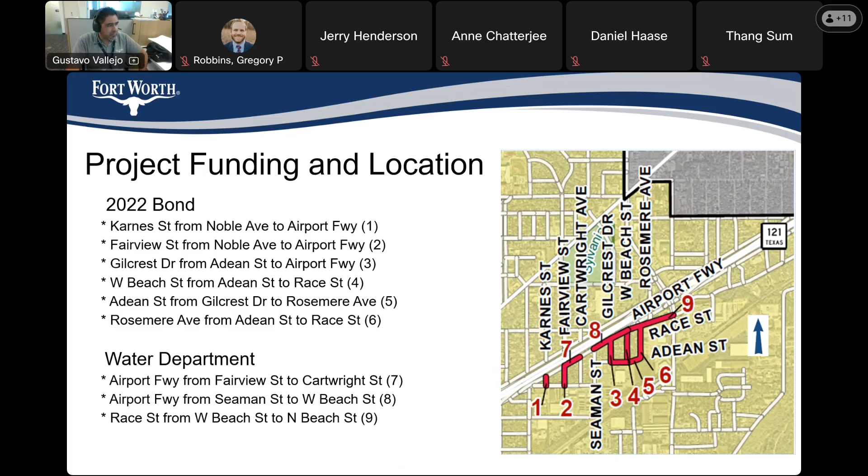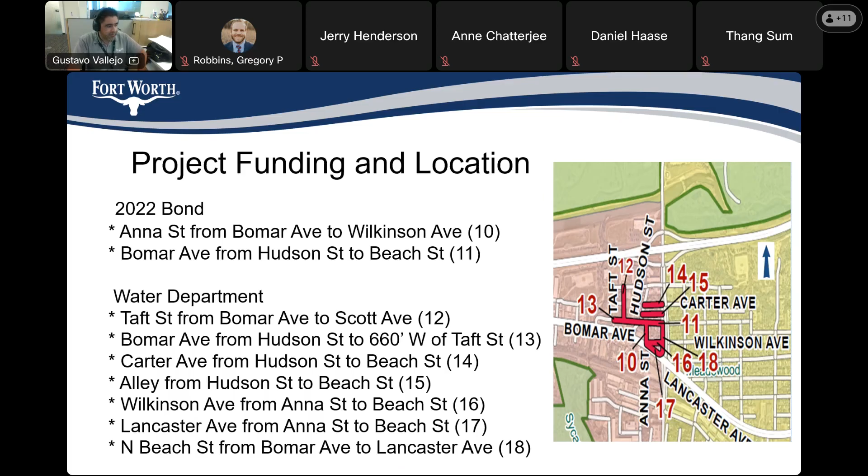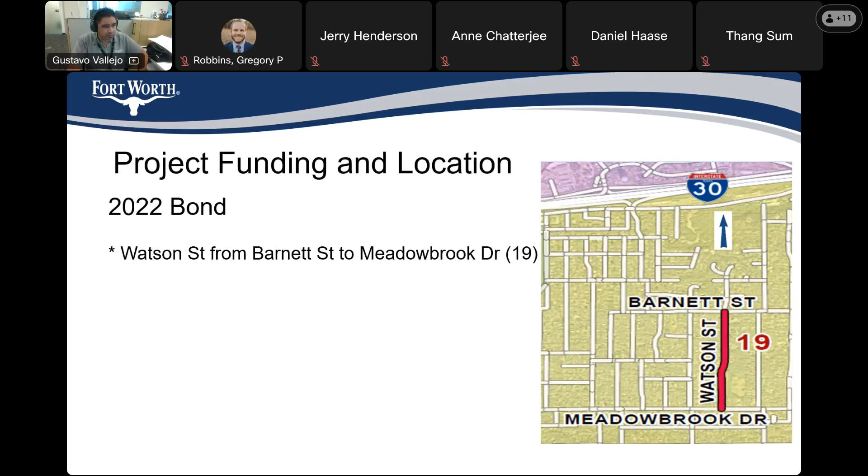On the next few slides, I will discuss the existing conditions present on these streets and go into more detail about the scope of each street.

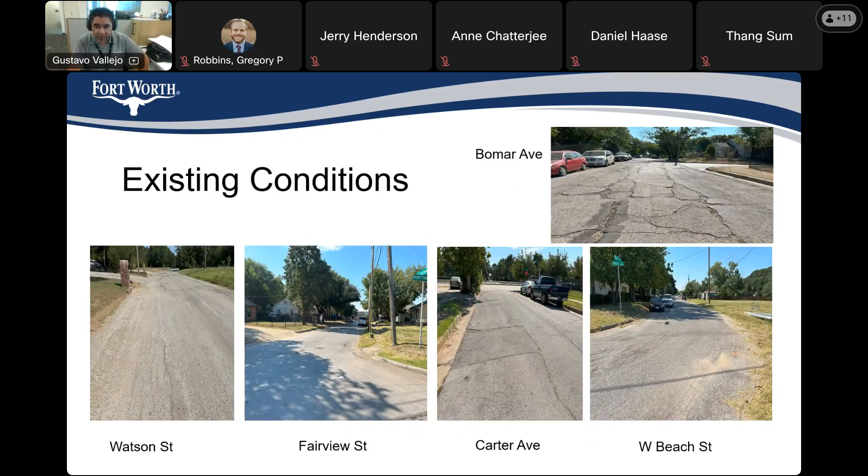On this slide, you can see the similar conditions of deteriorated asphalt pavement on Watson Street, Fairview Street, Carter Avenue, West Beach Street, and Bomar Avenue. Next, I'll go over what we will be doing to make them better.

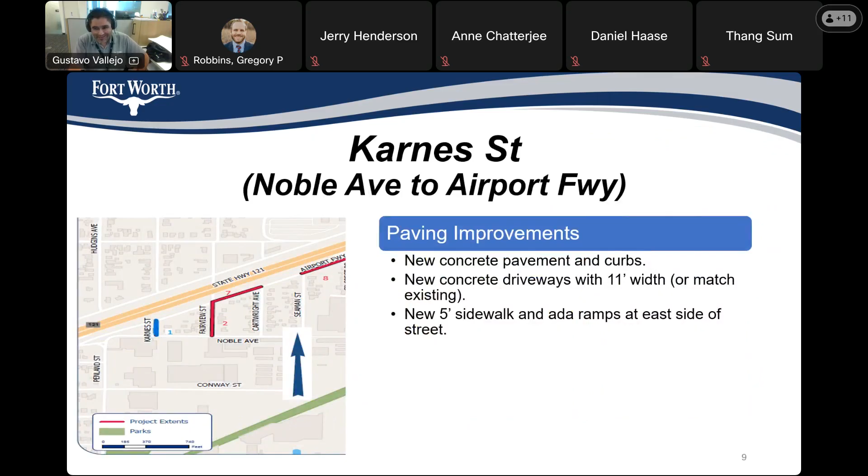For Fairview Street, from Noble Avenue to Airport Freeway, we have new concrete pavement with curbs, new concrete driveways with 11 feet minimum width, new ADA ramps, and a 5 feet sidewalk on the east side of the street.

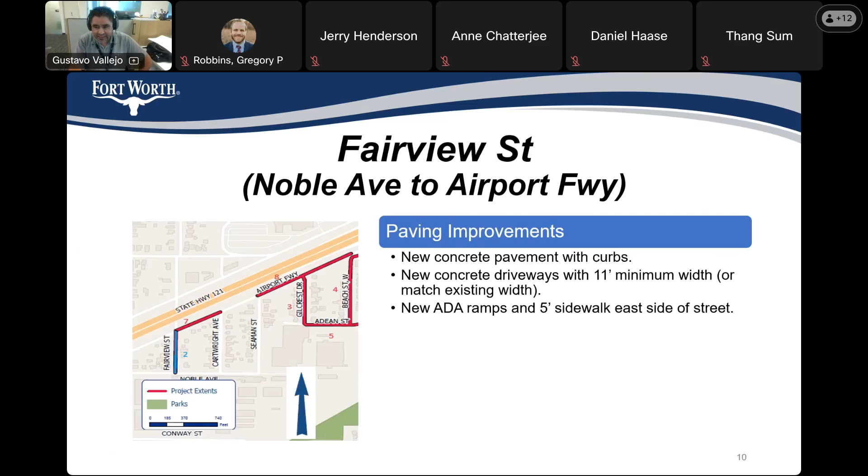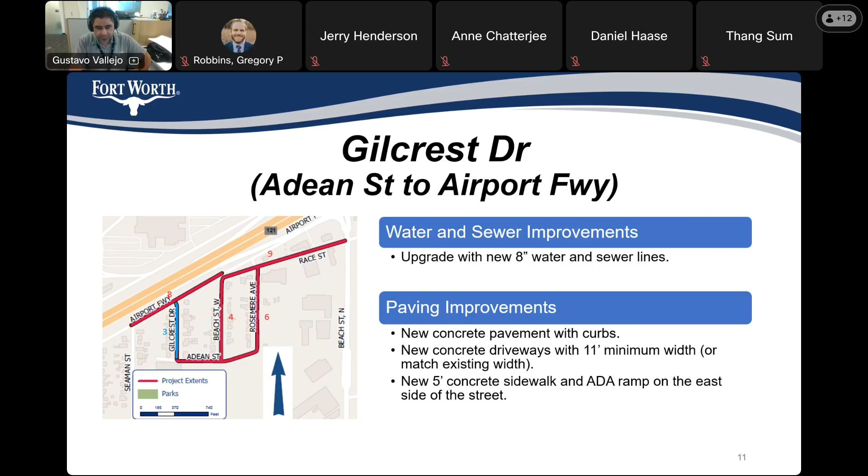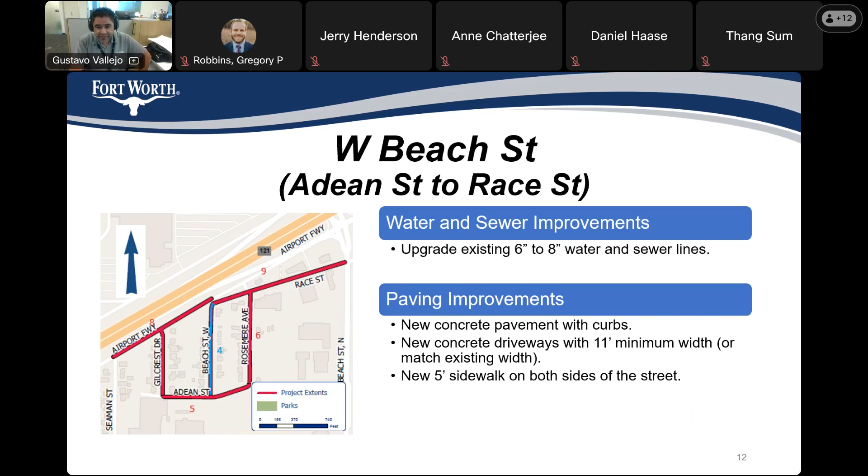For West Beach Street, from Adean Street to Race Street, we have upgraded existing 6 inches to 8 inches water and sewer line. For paving improvements, we have new concrete paving with curbs, new concrete driveways with 11 feet minimum, and new 5 feet sidewalk on both sides of the street.

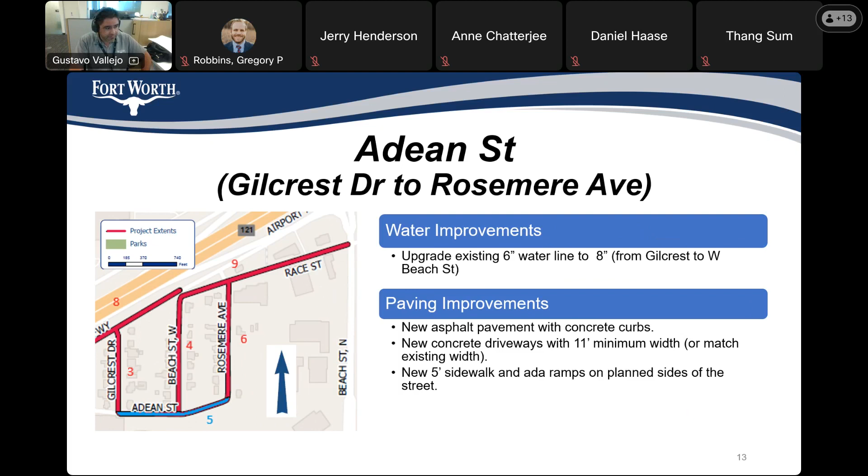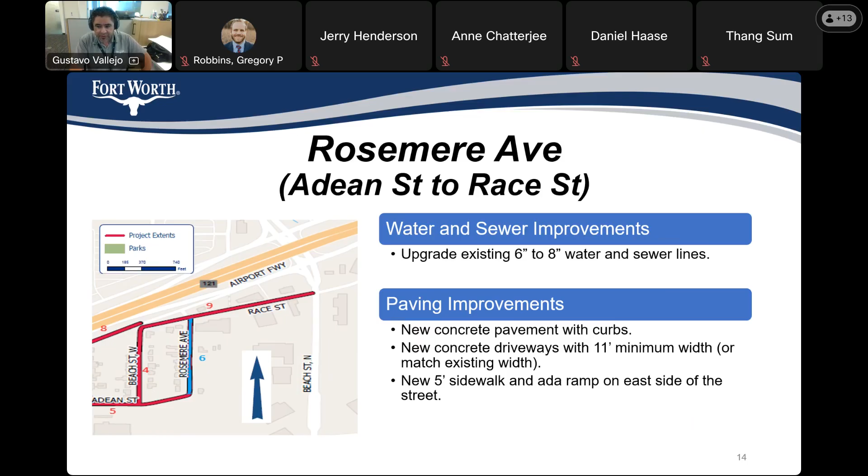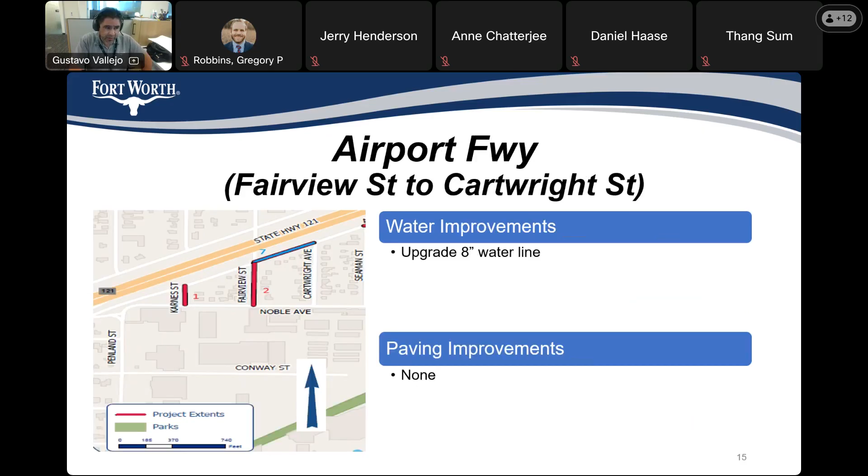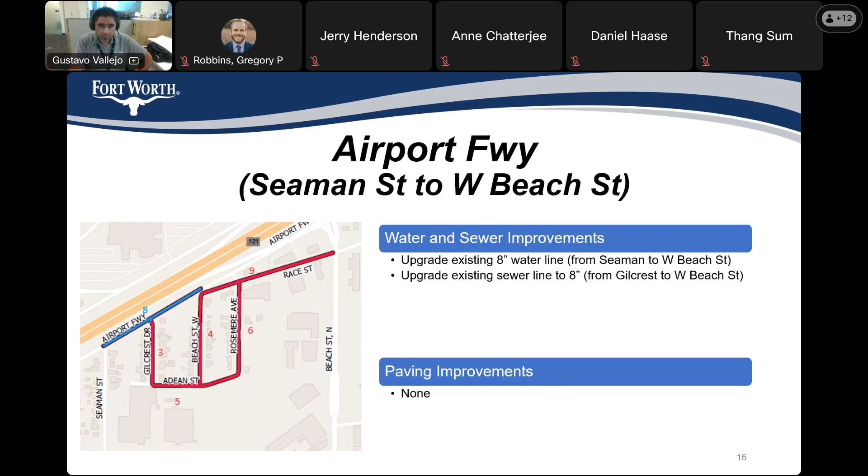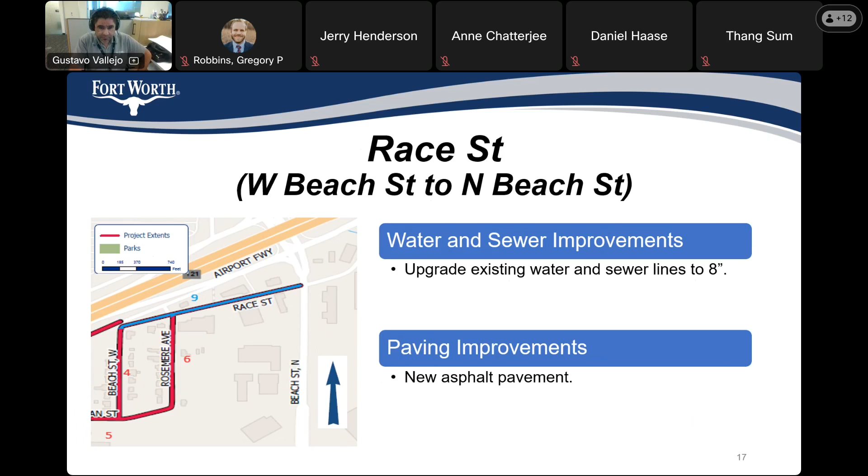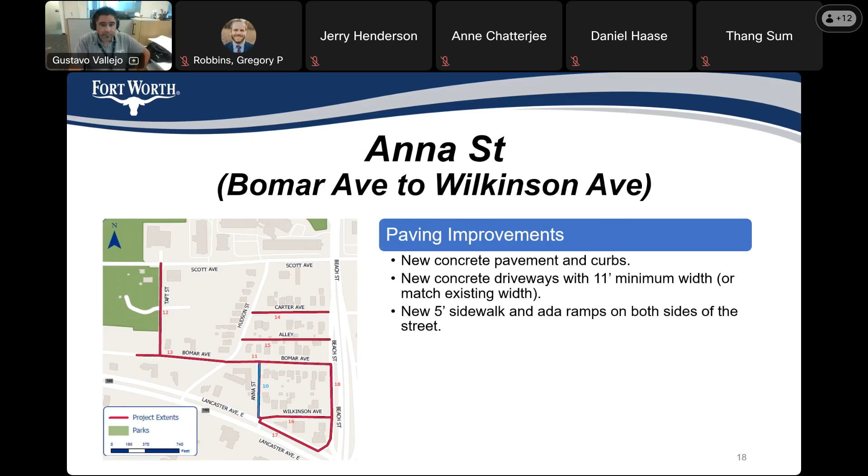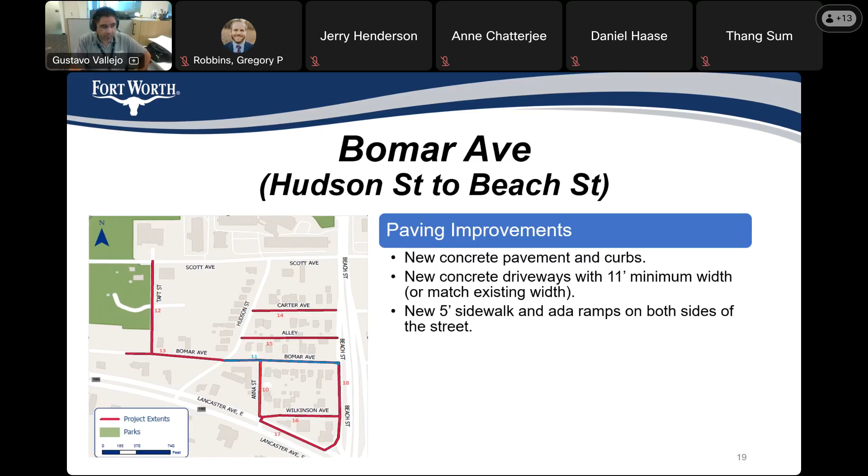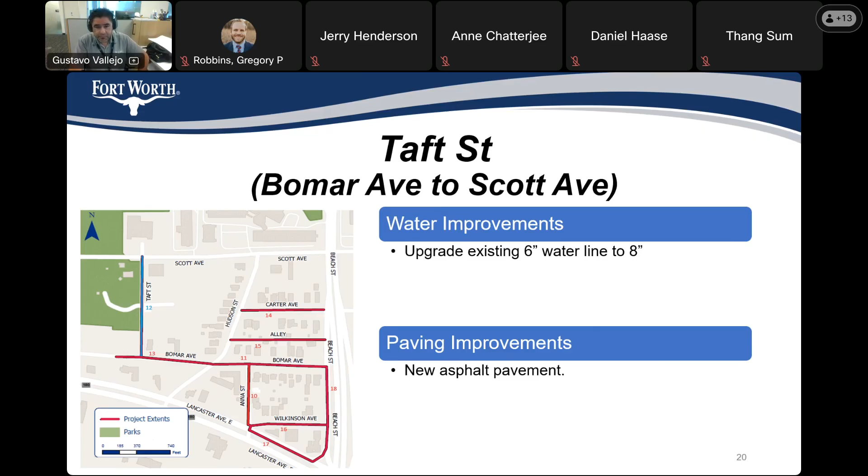For Bomar Avenue, between Hudson Street to going 660 feet west of Taft Street, we have water improvements to upgrade 6 inches water line to 8 inches, and new asphalt pavement.

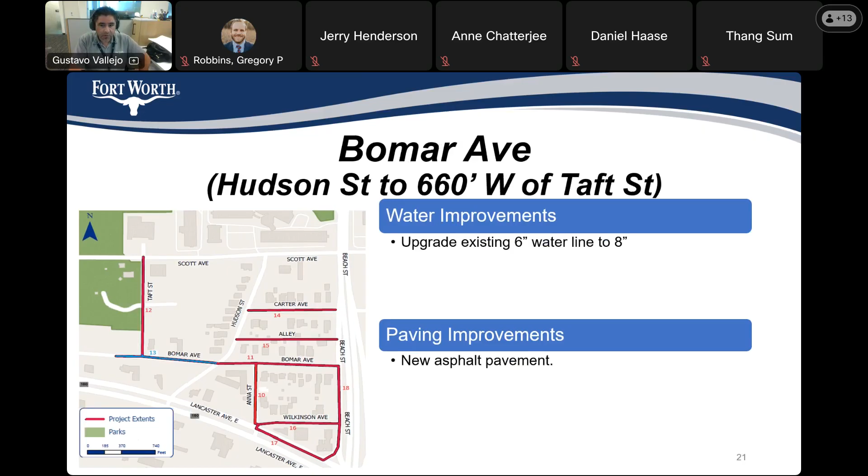For Carter Avenue, between Hudson Street to Beach Street, we had to upgrade existing 6 inches water line to 8 inches, and new asphalt paving.

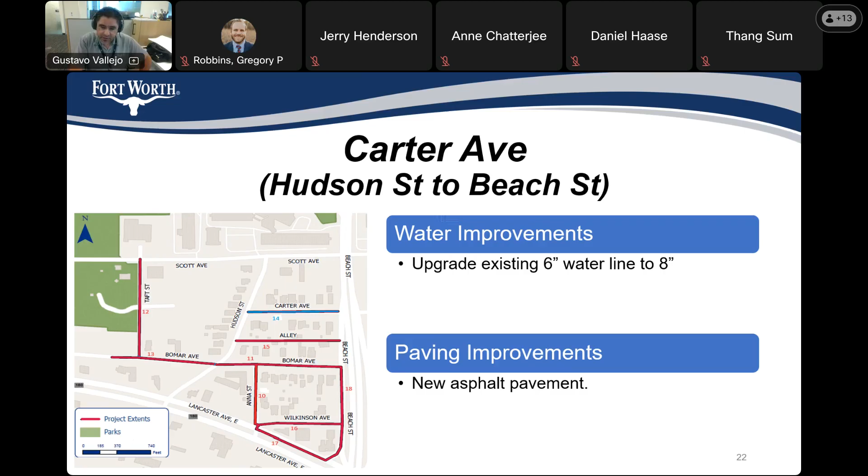For this alley between Carter and Bomar, and Hudson Street to Beach Street, we are looking to upgrade the existing 6 inches sewer line to 8 inches.

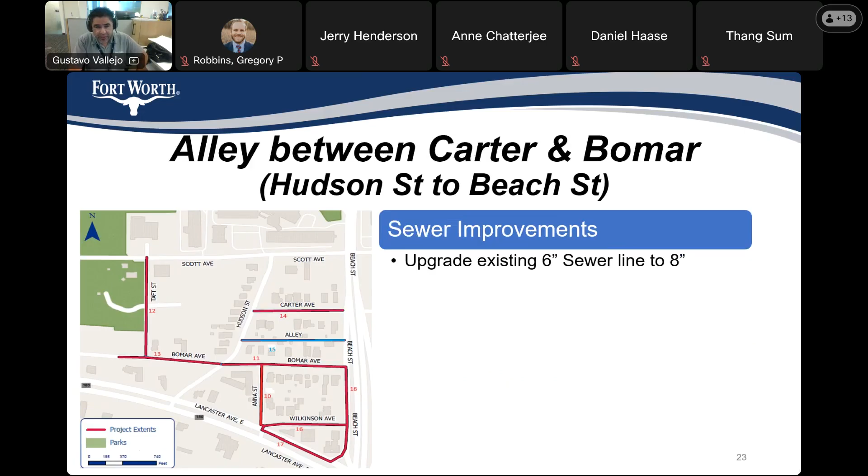For Wilkinson Avenue, between Anna Street and Beach Street, the water improvement includes the upgrade of existing 8 inches water line, and the paving improvements include new asphalt paving.

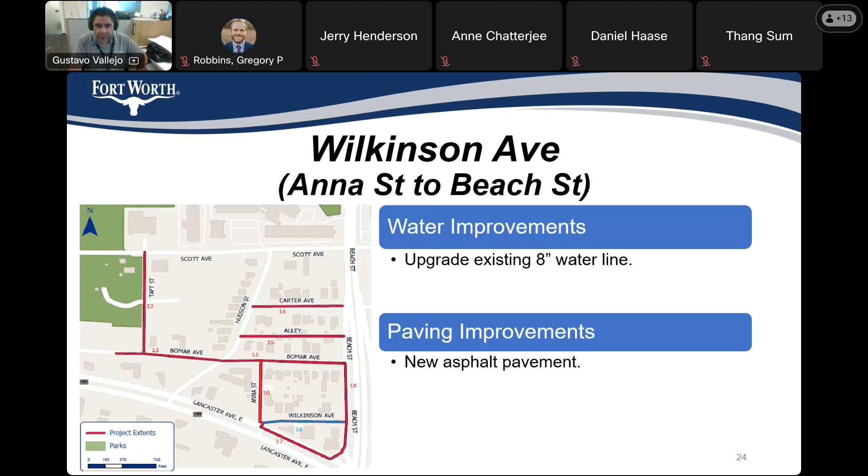For Lancaster Avenue, between Anna Street to Beach Street, the water improvements include upgrading existing 6 inches water line to 8 inches. The paving improvements include asphalt paving.

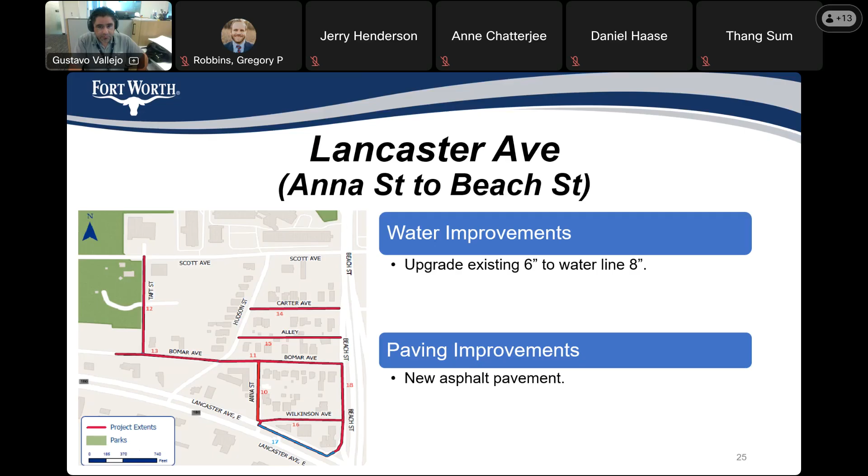For North Beach Street, between Bomar Avenue to Lancaster Avenue, water improvements include upgrading the existing 8 inches water line, and new concrete paving for paving improvements.

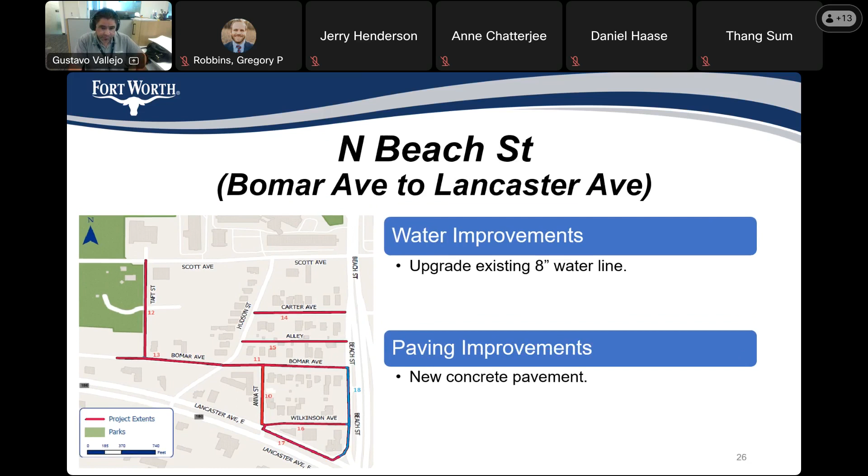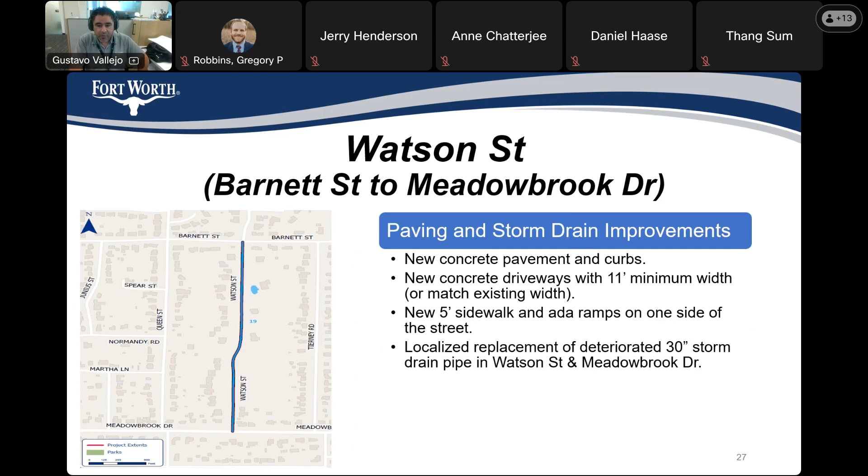On the next slides, we will be going over some construction information and frequently asked questions.

Why are we doing this project? As mentioned earlier in the presentation, this project is funded by the 2022 bond, which the residents of Fort Worth voted on, which targets locations in the city that need street improvements. TPW partnered with the Water Department to also replace underground utilities in those areas.

Will our water be turned off? There are two instances when your water will be turned off: first, when the service is transferred from the existing line to the temporary line, and second, when it's transferred from the temporary line to the new line. You will be given notice before that happens.

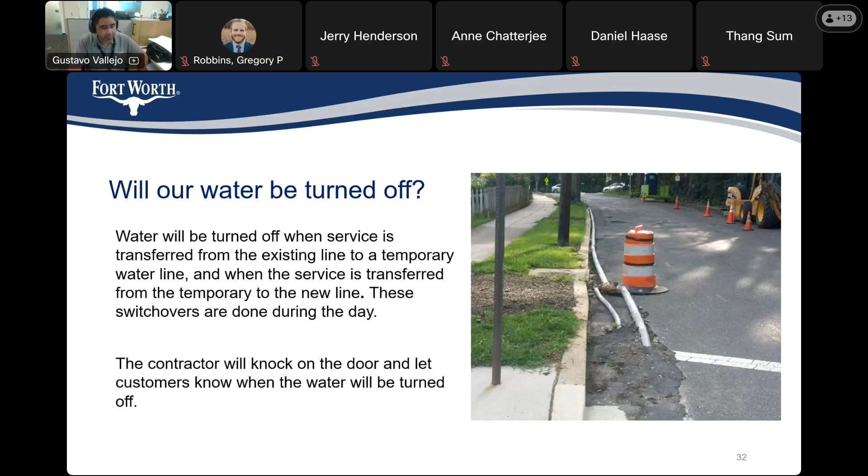How does a temporary line impact my home and water bill? The temporary line is to make sure you don't go without water during the construction. You will be billed based on your previous usage.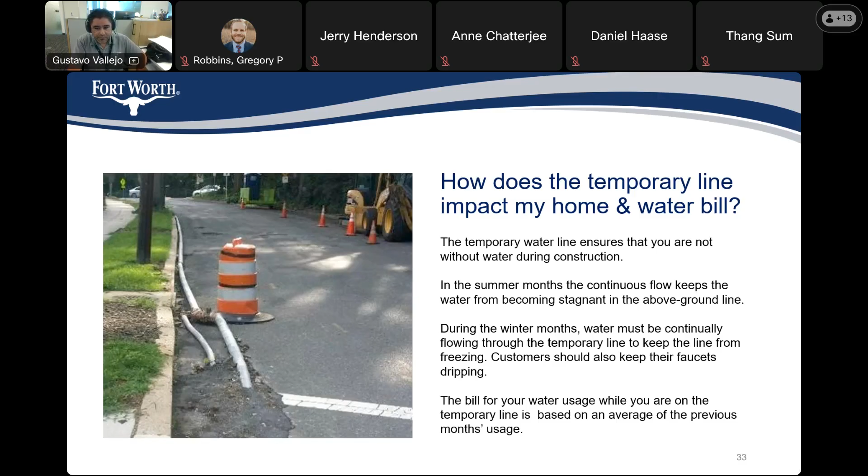Do you replace the water service line up to my house? We replace the water service line from the main line in the street onto your property line. We will also replace the water meter.

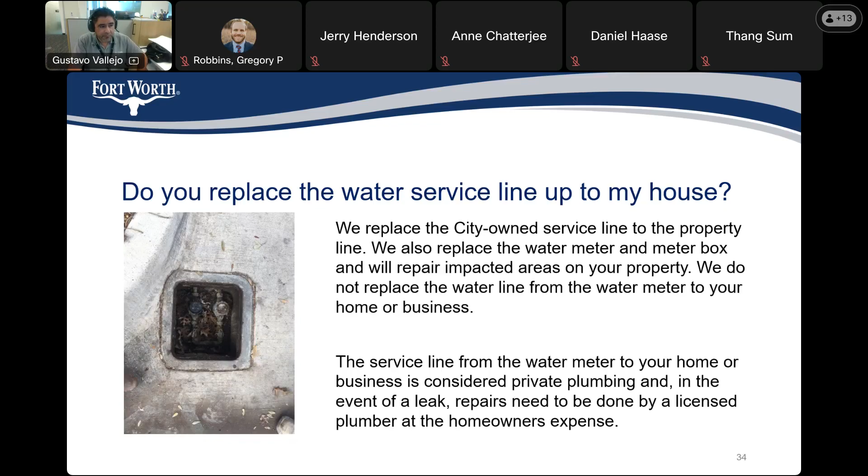Will you need access to our property? If we need access to your property, we will contact you. Will our sewer service be disturbed? No, your sewer services won't be interrupted.

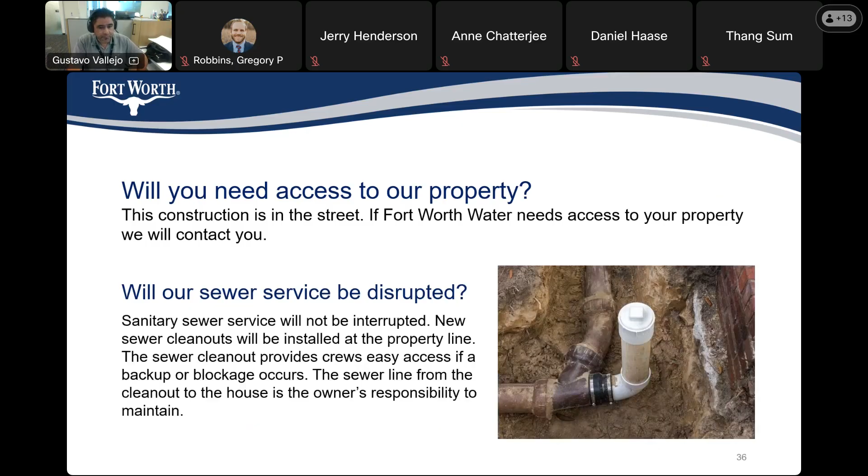Will the construction affect my irrigation? The contractor will cap the irrigation lines before they start. They may ask you to turn on your irrigation system so they can locate and flag the sprinkler heads.

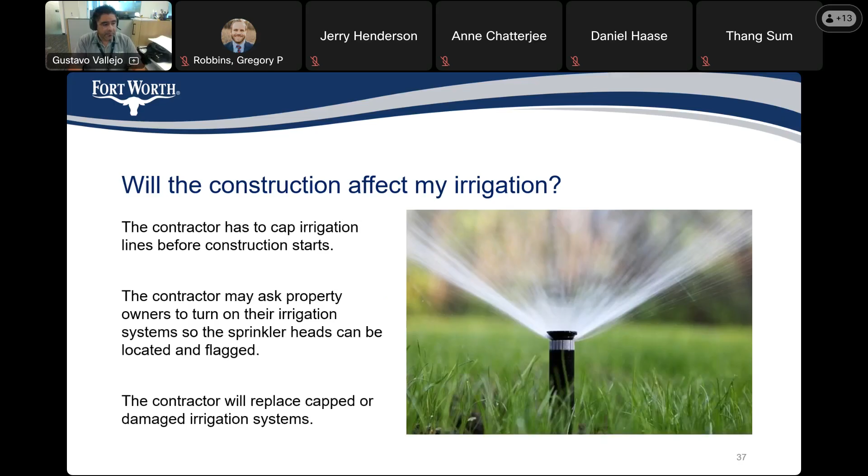Are we getting new curb, gutter, and sidewalks? As mentioned earlier, concrete curbs will be replaced on the bond-funded streets. Limited portions of the curb and gutter will be replaced on the water department funded street. If your driveway is to be replaced, the city will only replace the portion that is in the city right of way, not all the way to your garage.

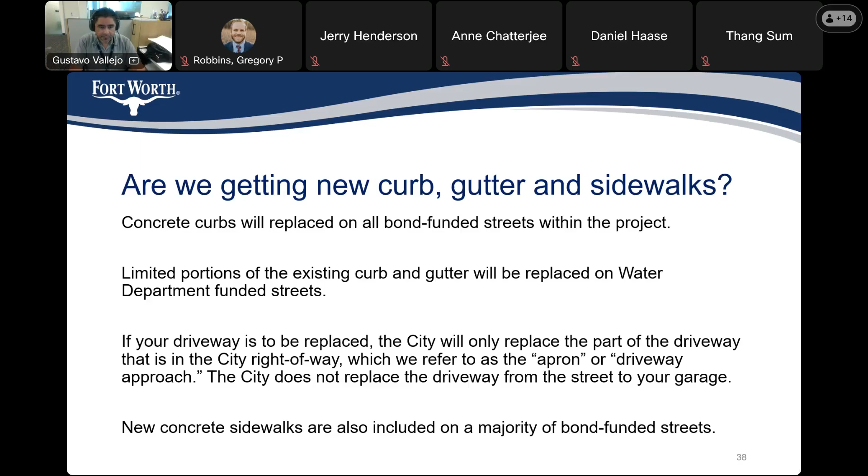Will I be able to access my driveway? There are two instances when you won't be able to access your driveway. The first is when pavement is being placed directly in front of your property, and the second is when your driveway is being replaced. You will get a heads up before this happens so you can make arrangements.

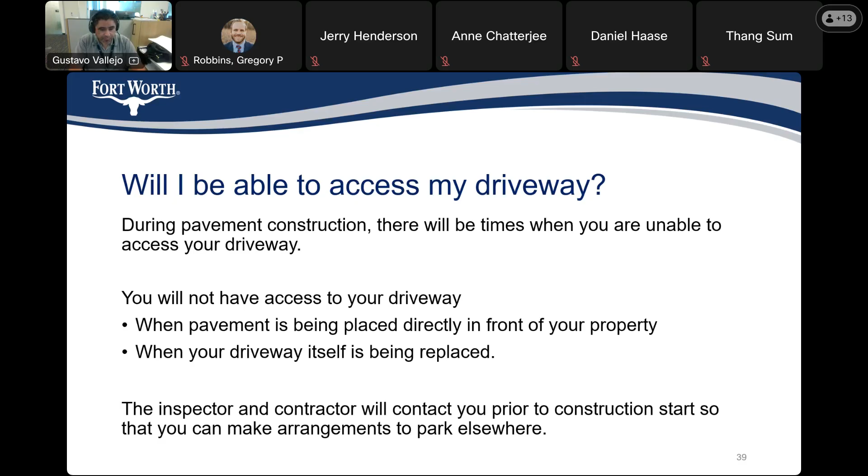What happens if my property is damaged? The contractor will take pictures and videos of the property before construction starts. We also encourage you to do the same. If there is any damage caused by the contractor, they will be responsible for it.

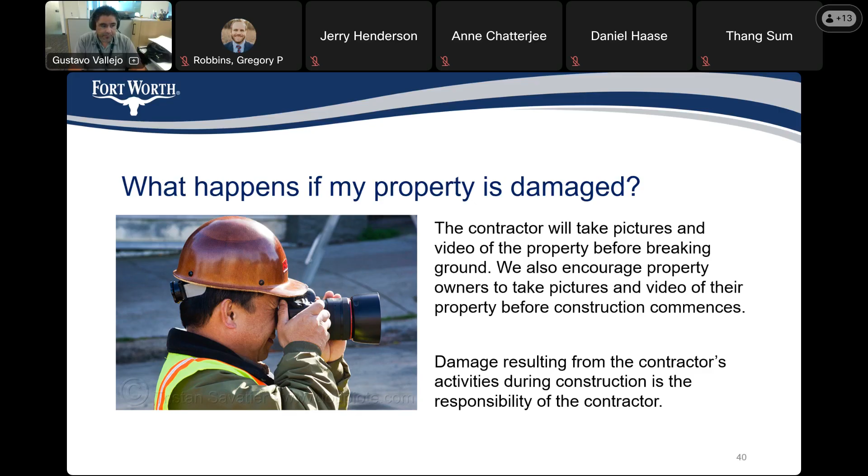Will there be lane closures during construction? There will be lane closures when the contractor is installing the water and sewer lines and when they are paving. There will be signs posted during those times.

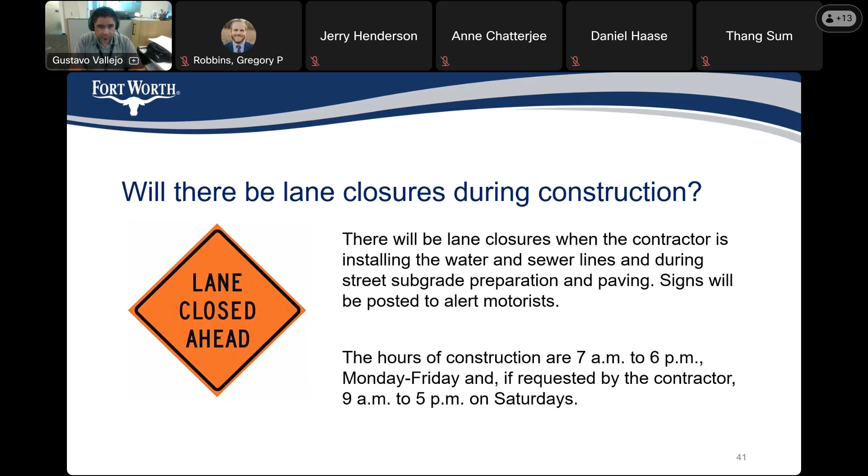Will the city trash truck be able to pick up my trash and recycling during construction? If your side of the street is closed on a trash day, the contractor will move your trash and recycling carts to the opposite side so they can be picked up.

Next, we will go over the construction phasing and schedule for this project.

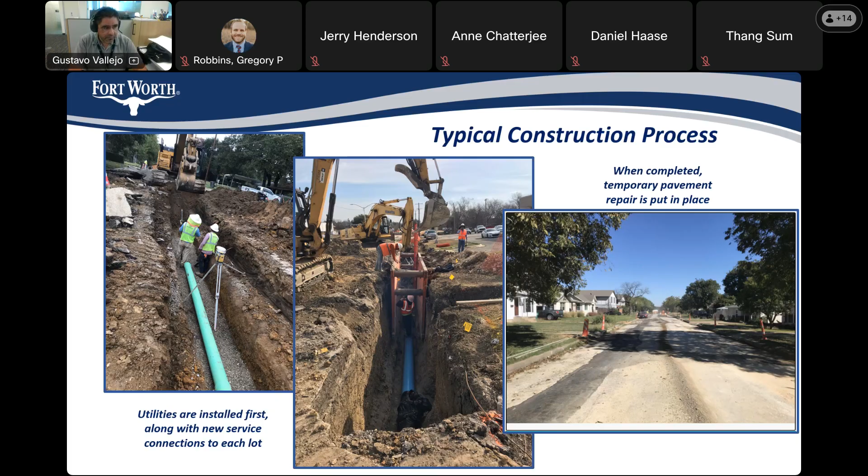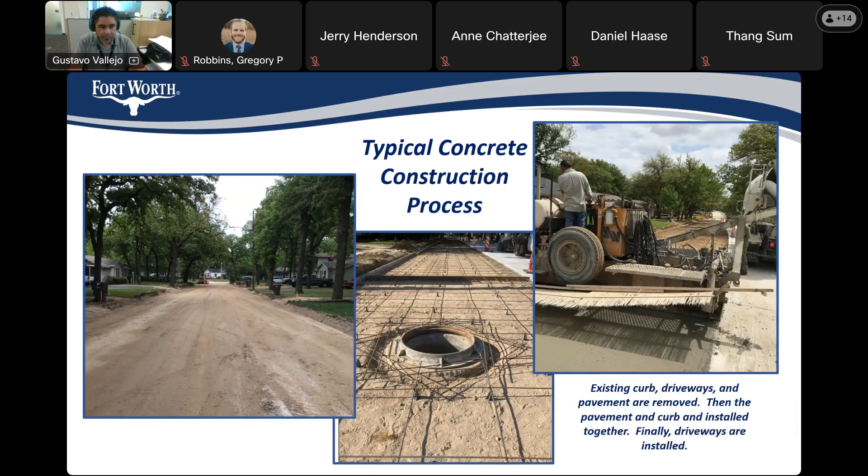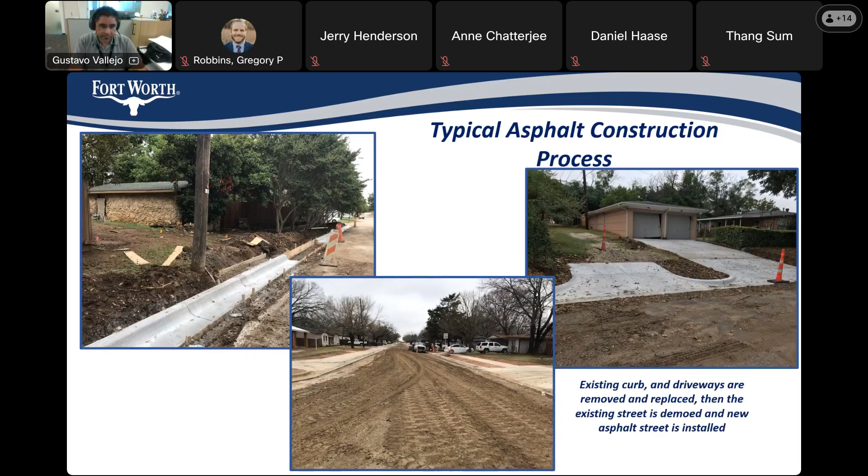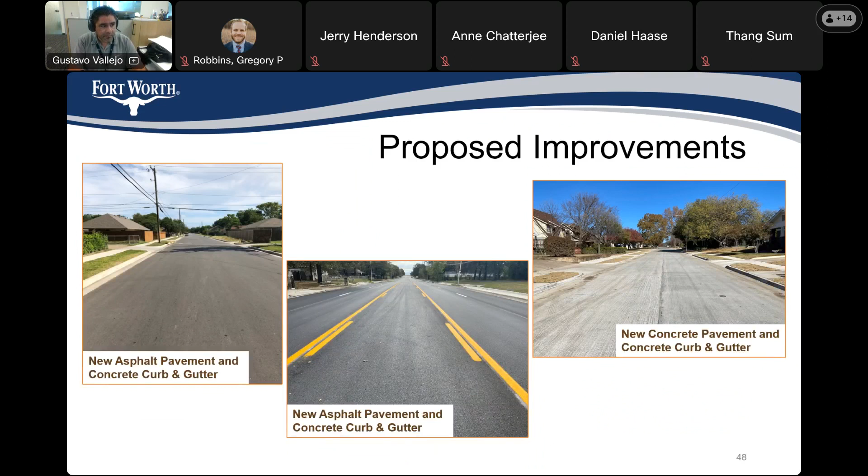After construction is complete, this is what you have to look forward to. Here we have pictures of the new concrete and asphalt street with new curb and gutter, and this is what the new concrete driveways, sidewalks, and pedestrian ramp crossings will look like.

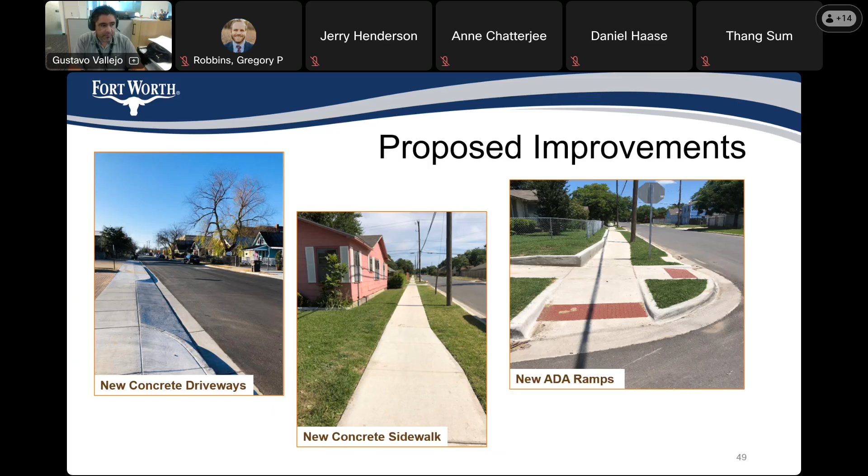Construction started on September 8th this year. For Race Street, Rosemere Avenue, and West Beach Street, the utility improvements are scheduled from September 2025 to January 2026. For pavement improvements, we are looking to get done from July 2026 to October 2026.

For Watson Street, we are looking to have the pavement improvements between December 2025 and May 2026. For Fairview Street, the pavement improvements are scheduled to start in April 2026 and finish in June 2026.